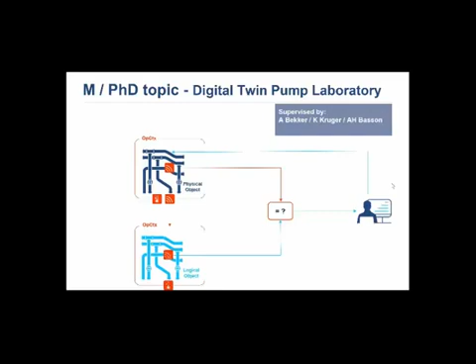This is a new direction of research for us, and in order to give some background, I'm going to briefly cover our proposal for the Rand Water Mechanical Engineering Research Chair, as well as the supporting facilities.

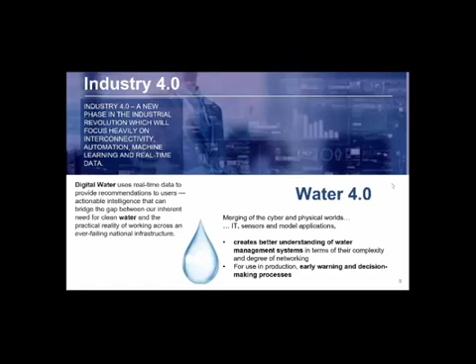Industry 4.0 is by now affecting every conceivable industry, with its focus on interconnectivity, automation, machine learning, and real-time data. The equivalent of Industry 4.0 in the water sector is termed Water 4.0 or digital water, where there's a merging of cyber and physical worlds to create a better understanding of water management systems. Specifically, we aim to apply this towards real-time data and algorithms to enable early warning and decision-making processes pertaining to water asset management. A very important concept in Industry 4.0 is that of a digital twin.

These are assets which are believed to be some of the main drivers of future business in every conceivable industry. A digital twin is defined as the representation of the state or behavior of a real asset through a digital counterpart within its operational context. The aim of coupling a digital representation with a real asset would be to enable decision aiding for a user.

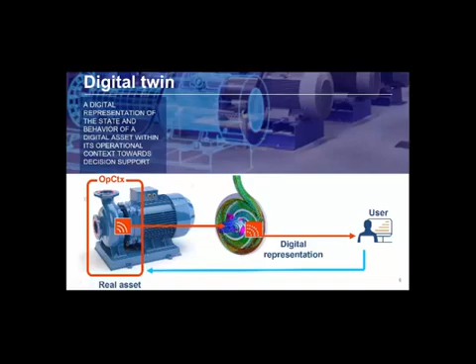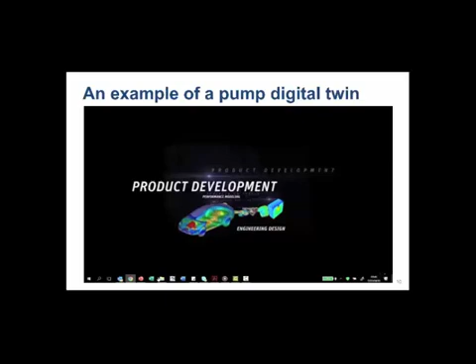Now, I'd like to borrow a bit from this demonstration video by the software company Ansys, who are really enabling digital twins through a platform they call Twin Builder.

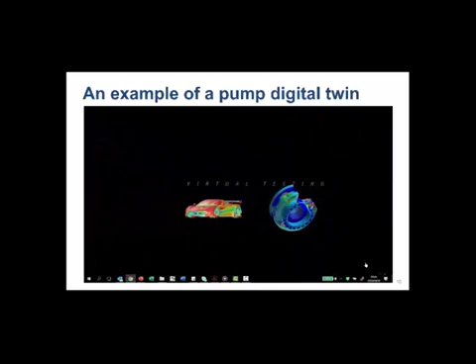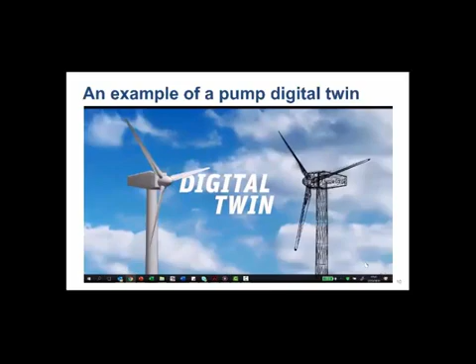For decades, companies have used simulation as a product development tool to discover failures and flaws in their designs. Now, engineers are using simulation after their products are built, sold, and deployed in the field. It's called a digital twin, a complete digital replica that operates in real time, giving engineers unprecedented visibility into the performance of their products. Here's a simple example.

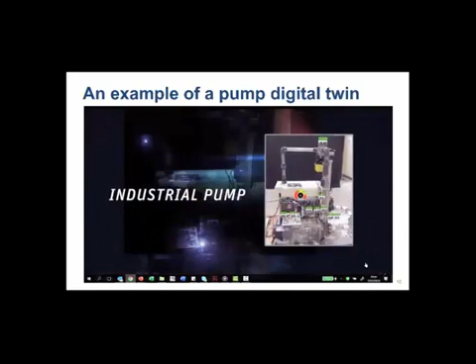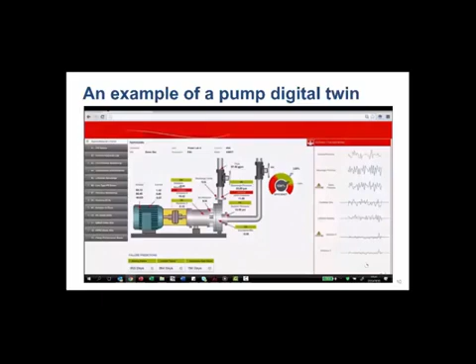This industrial pump has multiple sensors providing real-time information. The sensor's data is fed into the IoT platform, where engineers can monitor the normal operations of the pump. Here, an anomaly is introduced, as a valve is closed, prompting an alert and the need to troubleshoot the problem. The Ansys simulation platform allows engineers to evaluate all possible inputs and operating conditions.

Users can model a complete system and integrate live sensor data, creating a near real-time environment. By reproducing the problem virtually with the digital twin, you can identify and analyze the cause, propose, and test corrective actions. When an anomaly is detected, Ansys takes data from the system model and sends it to the edge, on-prem data center, or cloud, allowing for automatic 3D simulation to model the specific nature of the problem.

The digital twin allows for diagnosis and in-depth root cause analysis for physical assets in the field. Here, the root cause of the anomaly is identified by 3D simulation to be cavitation in the pump, as visualized by the purple vapor bubbles. The user can perform what-if scenarios on the digital twin for both testing and further optimization.

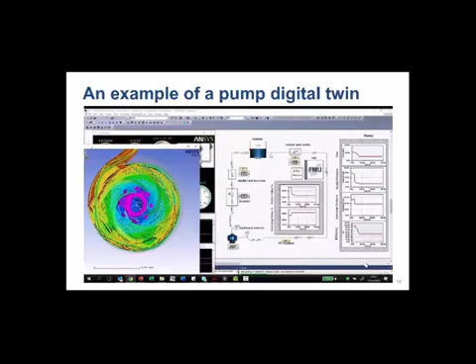With the Ansys platform, customized user experiences can be easily implemented. This allows for ease of use and communication through similar graphical interfaces that are customizable for each user. At this point, the user validates the corrective action found on the system model, will remedy the problem on the physical asset through in-depth 3D on-demand simulation.

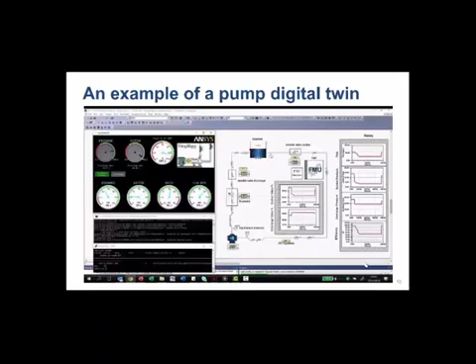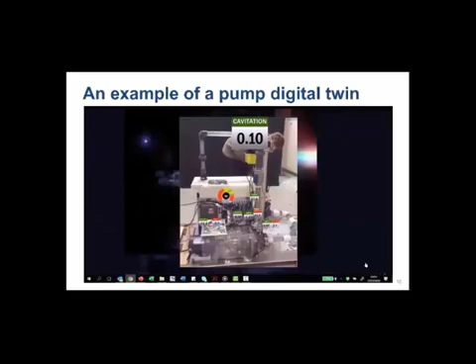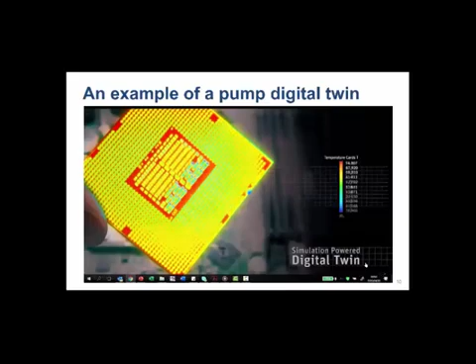Here, you can see that no more bubbles are present and the pump is once again operating properly. The cavitation issues have been corrected in the digital twin and can now be applied to its real-world counterpart. Digital twins require a complex and comprehensive knowledge of systems engineering. Only Ansys has the breadth and depth of simulation experience to bring the full power of digital twins to your engineering challenges.

Digital twins are very versatile in their application and can be component-based, as per the previous example, or can be used to serve very large systems.

Here is an example of the Shoaiba Phase 3 drinking water supply project in Saudi Arabia, where Fraunhofer Institute partnered with ABB to produce a leak detection system by modeling 1,600 kilometers of pipeline and supply from reservoirs. This system is represented by a digital model that calculates the measurement metrics at certain key points based on the temperature, flow rates, and reservoir levels. By looking at real-time measurements at these same metric monitoring points and comparing this to the model, leaks can be detected and the performance of the system can be managed and faults can be localized.

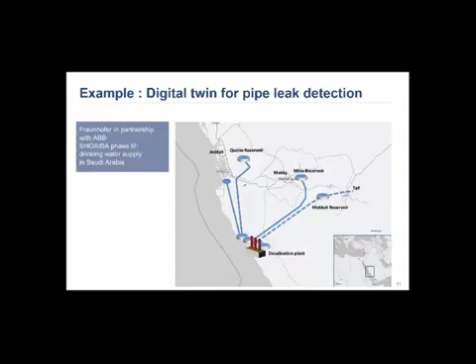So against this backdrop, we thought about harnessing some of the advantage of digital twins in our RAND water proposal. This includes bringing the power of simulation to operation.

This means that you are able to gain information about hazardous or remote operations by simulating this environment based on maybe some sensor inputs and the ability to deal with large volumes of information, which is too much for humans to process or too exhausting.

This means that maybe we can automate some simple decisions and use the watchdog capabilities of computers, which never need to sleep.

Computer models also give us predictive power. For instance, we can simulate what failures would look like on one-off builds and then monitor the response from a model and compare that with real-time measurements to give us an indication of early warning for failure.

We can run what-if scenarios to check out hypotheses for important strategic decisions. And we can use new machine learning techniques to create models that learn from data. Also, computers give us the ability to recognize patterns from certain responses and to remember them forever.

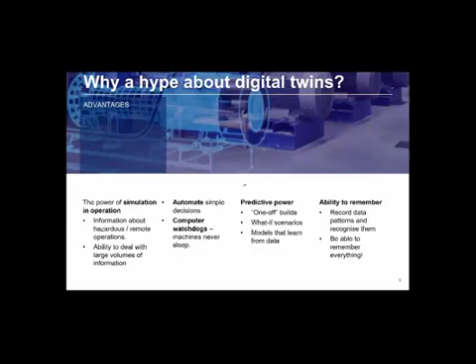A key concept about digital twins is that the mere gathering of data or the creation of complex models does not itself give decision aiding value. This is where we would like to invite the systems design process into digital twins for water asset management.

This means that a digital twin solution will be designed for the appropriate decision level, whether it be strategic, technical, or operational, and for the right temporal scale, whether it is to gather hindsight, insight, or foresight.

Also, many systems today, when it comes to vibration monitoring and modeling, have a monitoring capability. That means that from real-time data, we are able to get some descriptive metrics about a system's response, and maybe with basic analytics, we can augment that to give diagnostic value, for instance in gearbox monitoring or the monitoring of bearing failure.

However, our focus is going to be to progress from diagnostic value towards predictive value or even prescriptive value, where we can say that a component will last this long and prescribe a way in which a failure or a problem can be dealt with.

Of course, the ultimate value of digital twins may lie in their potential autonomy, where large amounts of simple decisions are taken and the according actions are initiated without human interference.

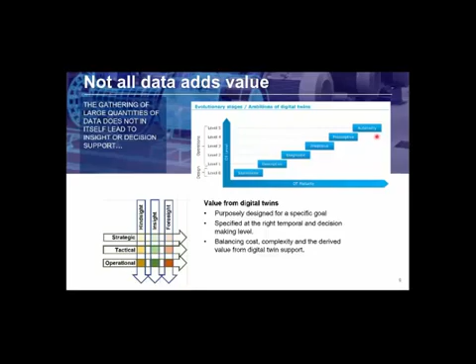So for RAND Water, the proposal of our first master's project would be to create a digital twin of the pump test laboratory at Stellenbosch University. Here, 3 single-stage centrifugal pumps are coupled with PVC pipes.

These pipes can be reconfigured to couple these pumps in series or in parallel. The pumps are driven by electric motors and equipped with variable speed drives.

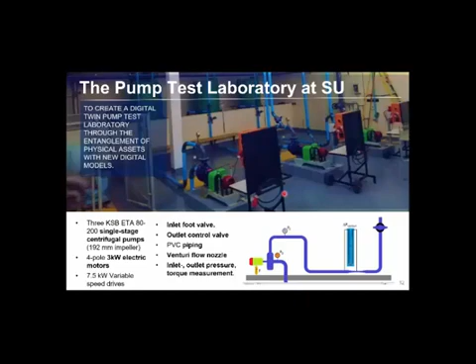The idea would be to better equip the system with more measurements and to digitize them in order to receive real-time information and to build more complex models on top of that, whether they be machine learning or physics-based models such as computational fluid dynamics, in order to simulate specified phenomena on these pumps, to gear these measurements and models towards the detection, diagnosis, and prognosis of anomalies and their effects.

And perhaps to systematically induce fault in the system to see whether our models are indeed able to cope or to give the desired responses we anticipate.

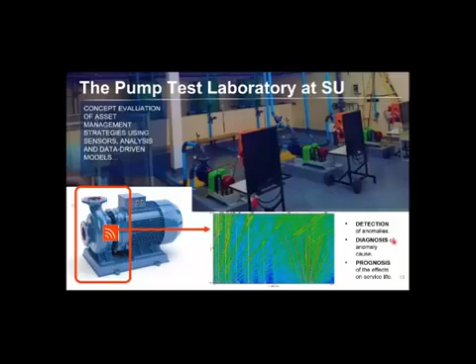With our kickoff in 2020, the plan is to have a master's student in 2021-2022, ideally continuing towards a PhD, and as time progresses, to increasingly progress from the Stellenbosch pump test laboratory into the field and to trial some of these solutions on real infrastructure.

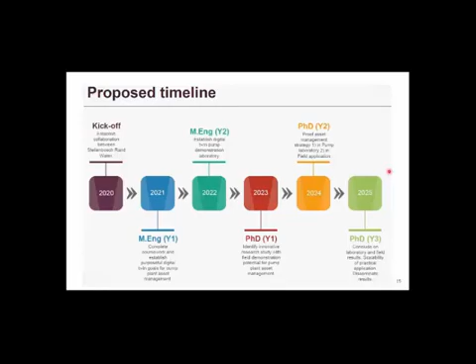The facilities at our disposal include the structural laboratory, the sound and vibration laboratory, which is expertly equipped with vibration sensors, data acquisition, and analysis software, and the automation and design laboratory, which has a history in creating digital twins for the manufacturing industry.

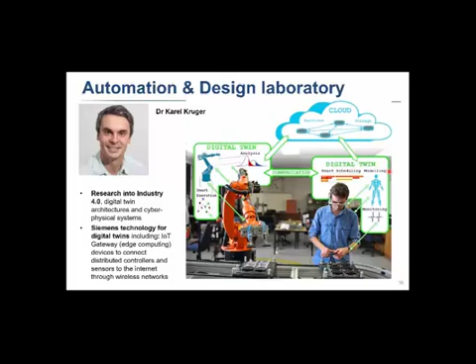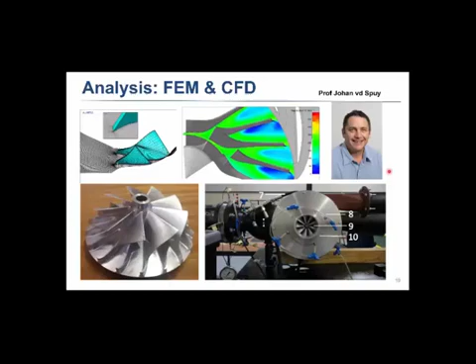We hope that with the knowledge of Dr. Karel Kruger and Prof. Anton Basson, we can also bring this expertise to water asset management. Finally, Stellenbosch University is also equipped with experts such as Prof. Johan van der Spuy and very good licenses for finite elements and CFD.

Looking a little bit broader, Stellenbosch University houses the Water Institute. This is a very prestigious institute, mainly focused on water health with many international connections.

One of the biggest opportunities in this project is offered by the Fraunhofer Innovation Platform, which kicked off in July this year. This platform provides the Rand Water Research Chair and the new postgraduate student with the opportunity to collaborate with the Fraunhofer Institute in Germany.

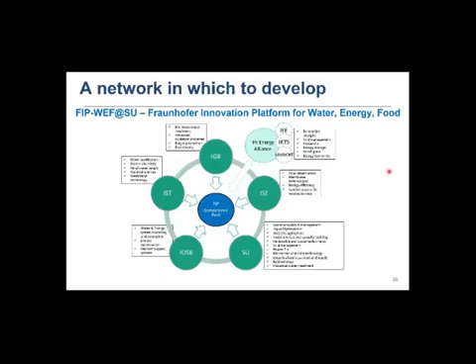This institute operates at the cutting edge of what is currently possible in water digitization, and it is up to us to create a collaboration where we could maybe import some of this know-how into the South African context to create something really unique. We have a bursary available for a master's and PhD student, and the ideal would be that this person may actually join Stellenbosch University with the prospect of becoming a junior lecturer.